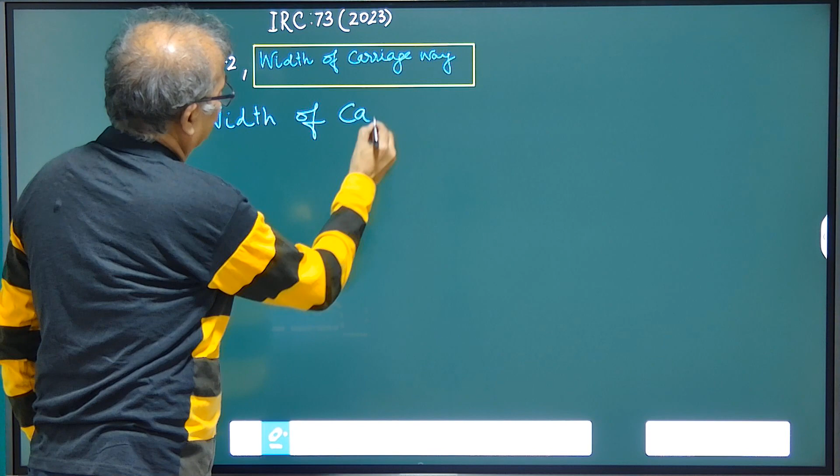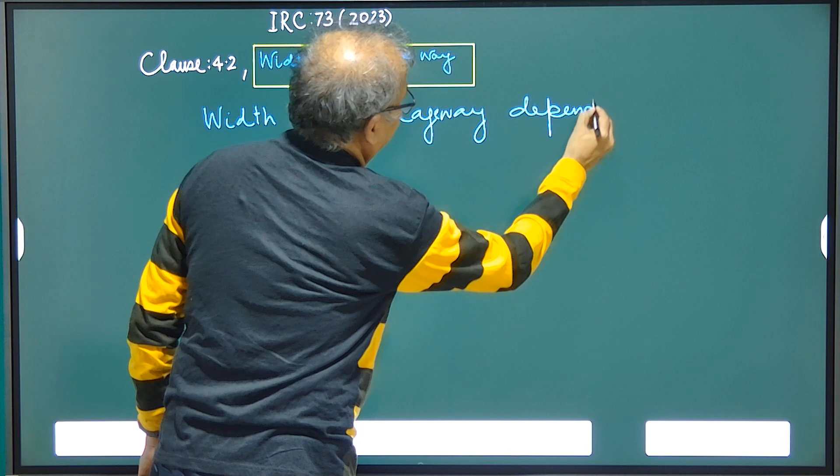सो लेट अस टेक अप विड्थ ऑफ कैरेजवे। Width of carriageway depends on 3 चीजों पे डिपेंड करता है। एक तो ट्रैफिक लेन पे, कितने नंबर ऑफ ट्रैफिक लेन है, विड्थ ऑफ ट्रैफिक लेन क्या है, और उस पर जो मोटर व्हीकल चलेगी उसका विड्थ क्या है, उसके लिए कितने क्लियरेंस की जरूरत होती है। तो ट्रैफिक लेन, ट्रैफिक मूवमेंट के लिए इंटेंडेड फॉर द व्हीकल मूवमेंट, जो भी लेन होती है उसको ट्रैफिक लेन कहते हैं। तो इट डिपेंड्स ऑन फर्स्ट नंबर ऑफ ट्रैफिक लेन्स।

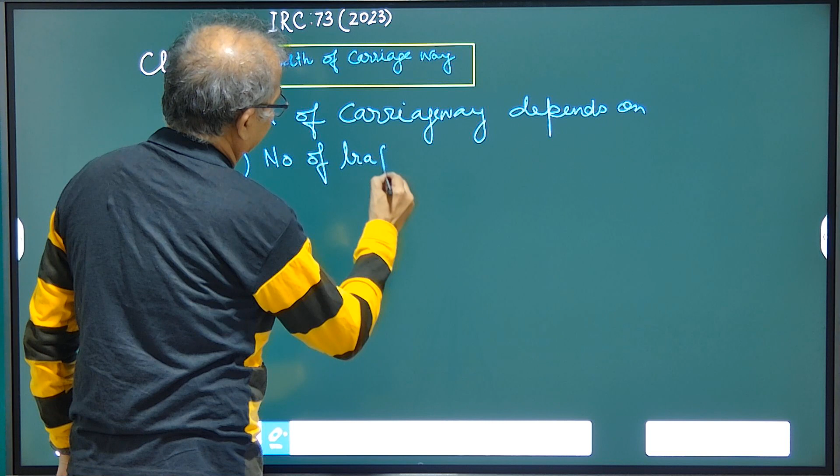Number of traffic lanes. Traffic lane means the lane intended for the single vehicle movement.

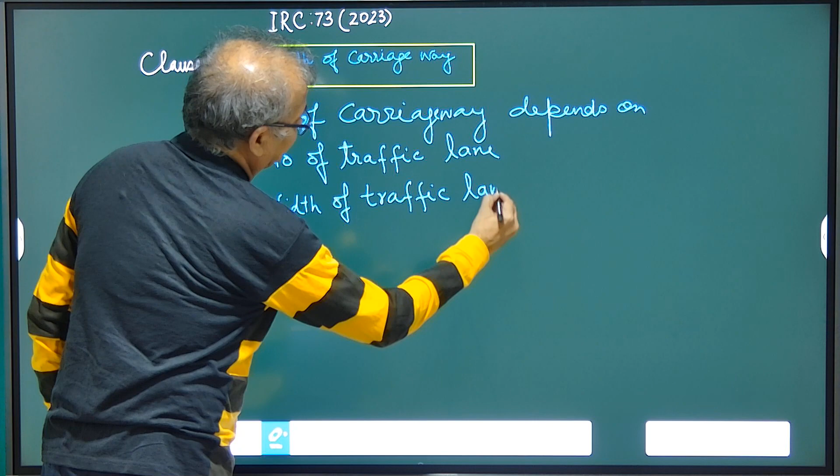Then width of traffic lane. Width of traffic lane जो होती है वो width of vehicle पे डिपेंड करती है। IRC और इल्सवेयर जो स्टैंडर्ड्स हैं उसमें एक स्टैंडर्ड व्हीकल की विड्थ मैक्सिमम मानी गई है 2.44 मीटर की, जो मैक्सिमम विड्थ ऑफ द व्हीकल है। IRC में हर जगह IRC लिखा गया है बट IRC में इसका प्रोविजन मिलता नहीं है, बट इन सम स्टैंडर्ड इट इज इन एक्चुअल इट इज 2.44 मीटर।

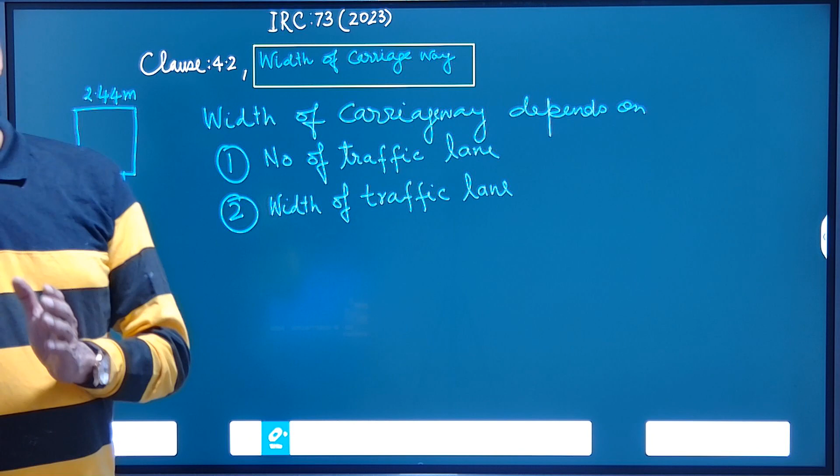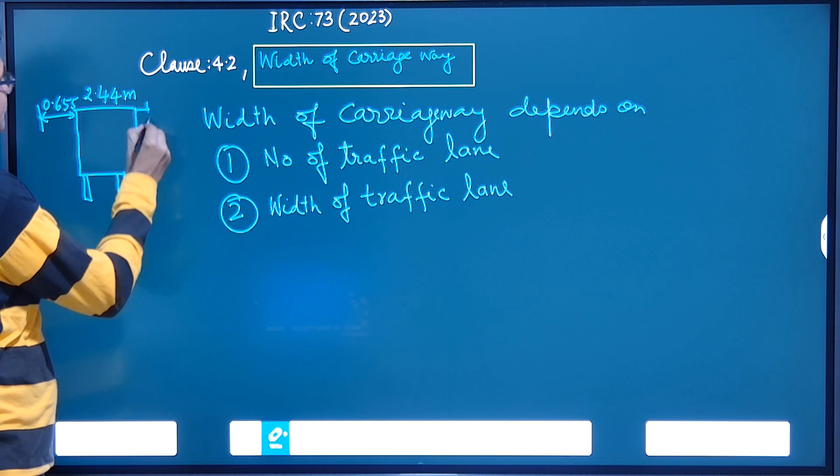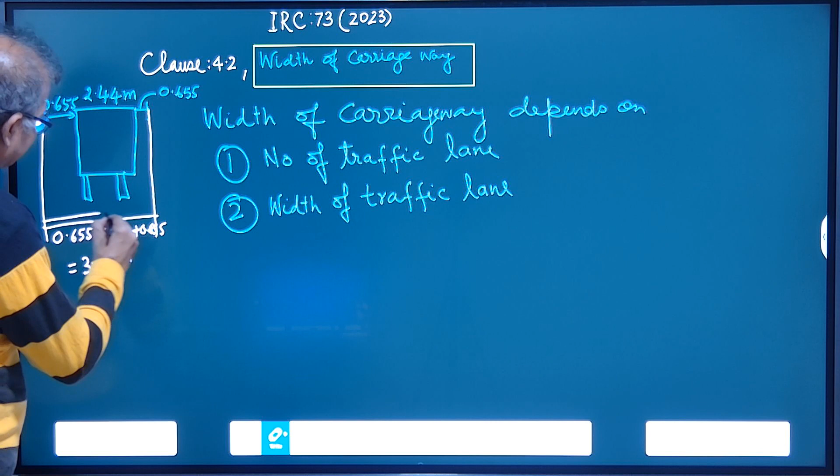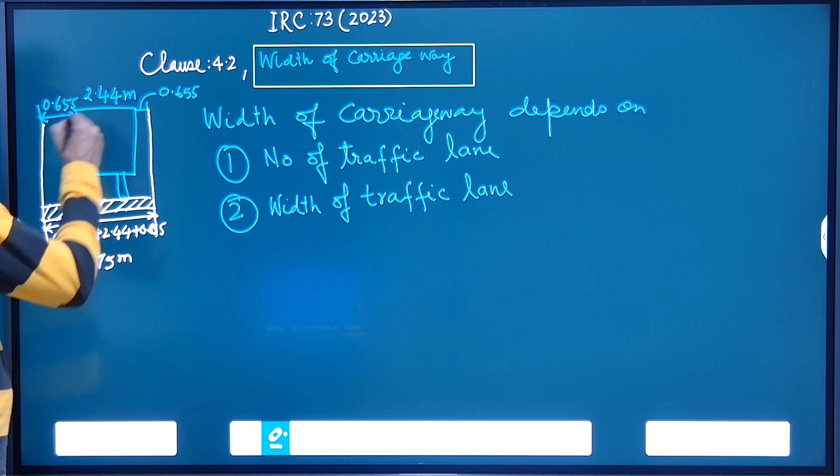जो भी स्टैंडर्ड व्हीकल होगी उसका विड्थ 2.44 मीटर होगा। फॉर द कंफर्टेबल ड्राइविंग जो मार्जिन होना चाहिए, दैट शुड बी ऑन आइदर साइड 0.655 मीटर। सो ये 2.44 की व्हीकल है और उसके पास फास्ट मूवमेंट के लिए दोनों साइड में जो इंटेंडेड क्लियरेंस होता है वो 0.655 हो, तो इस हिसाब से जो सिंगल लेन विड्थ होगी वो होगी 0.655 प्लस 2.44 प्लस 0.655। So if we add on all this, it will become 3.75 meter. जो सिंगल लेन की सड़क हो, that should be 3.75 meter wide to accommodate a traffic movement of a vehicle which is having 2.44 meter maximum width.

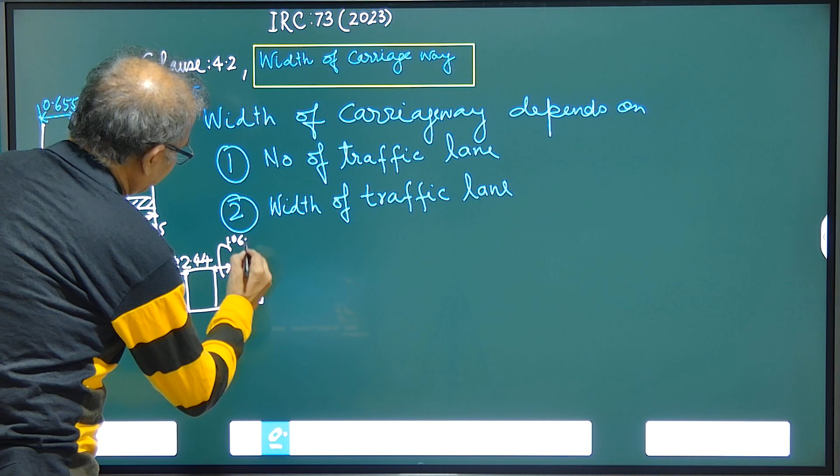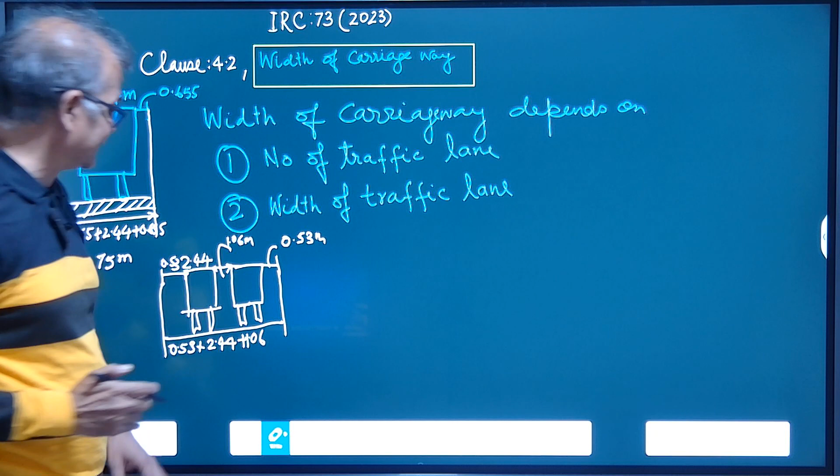In case of two lane, it is desired to have 2.44 meter vehicle with side clearances 0.53 meter. Again, in between two vehicles there should be gap of 1.06 meter. Then again side clearance should be in lateral direction, it should be 0.53 meter. So the lane width will be required for the two lane: 0.53 plus 2.44 plus 1.06 distance between two vehicles plus side clearance plus again 2.44 width of another vehicle plus side clearance 0.53. If we add all this, we find it is 7.0 meter.

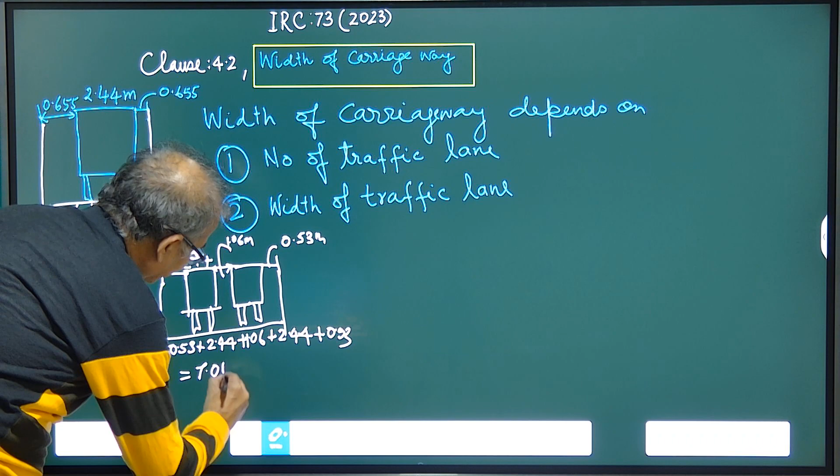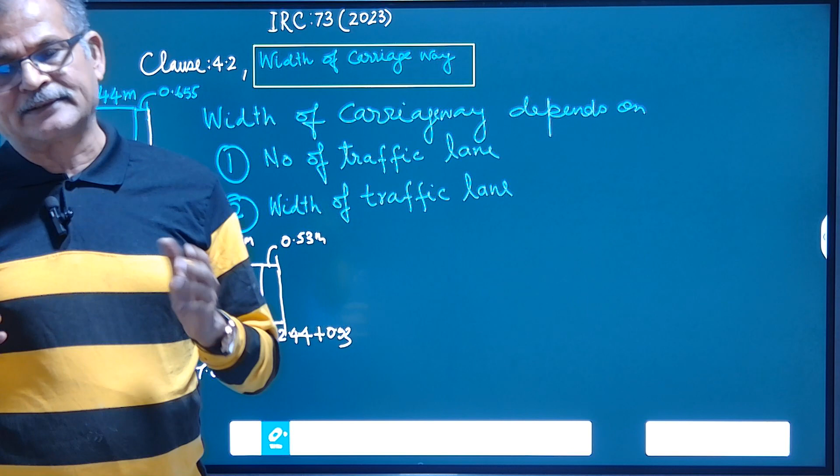It means single lane of 3.75 meter and two lane of 7 meter wide should be constructed, keeping the vehicle width of 2.44 meter. In IRC 03, the maximum width of vehicle is specified as 2.5 meter. Accordingly, the side clearances will get changed. But further, in 2020, it has been again revised. The maximum width of the vehicle has been notified in Gazette as 2.6 meter. So whatever modification and notification is being done by Ministry of Road Transport, we should keep watch on it so that we take the latest values of the width dimensions of the vehicle.

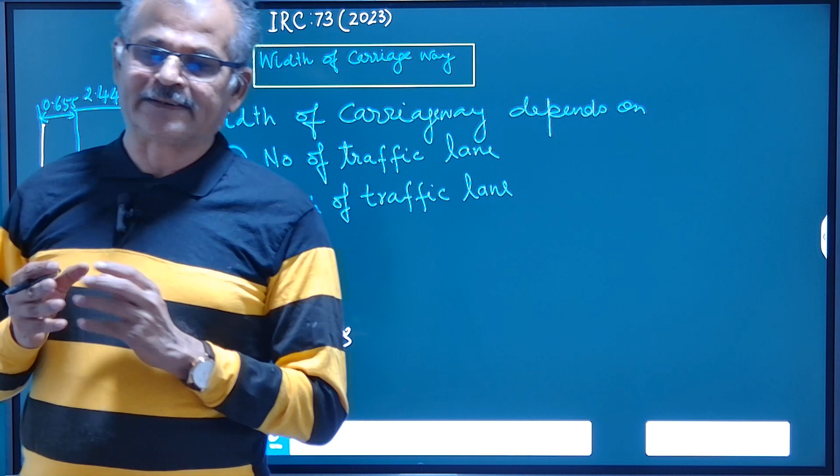We will be taking up IRC 03 to know what is the width of vehicle, what is the maximum weight they can carry, what is vertical clearance, because all this will be required for the designing purpose.

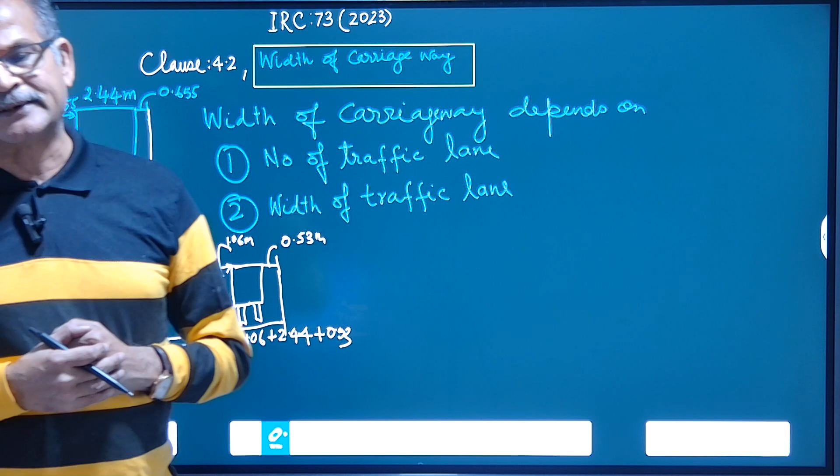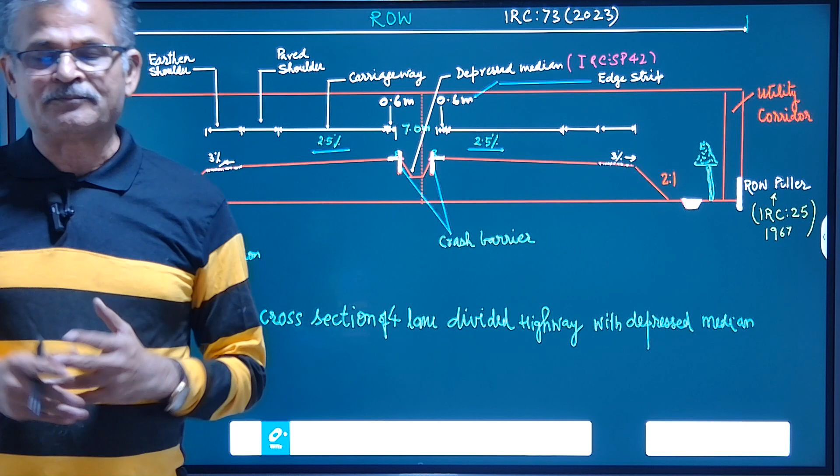So this is figure 4.6 given in IRC 73, showing what should be the width of four lane divided carriageway. This is the typical cross section of a four lane divided highway with depressed median. As said in the introduction, raised median has been completely removed from the IRC code, and with the new project there will be a depressed median of 7 meter wide.

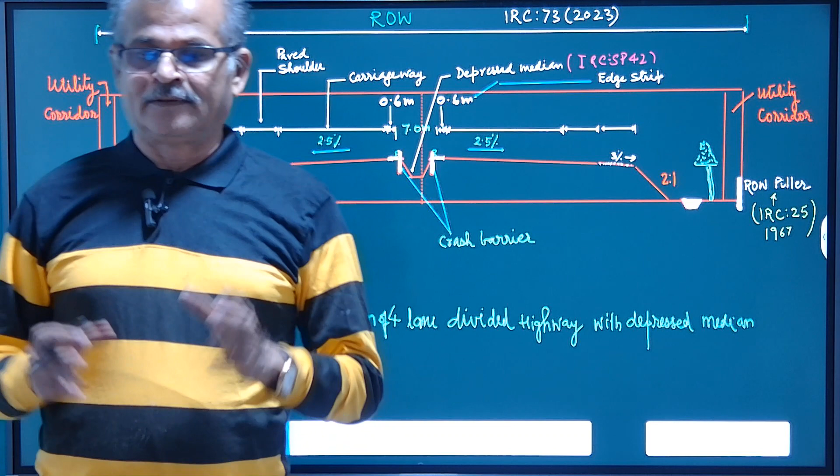There will be an edge strip of 0.6 on both sides, and in the median there will be metal beam crash barriers provided for safety purposes. The detail of this is already given in IRC SP 42.

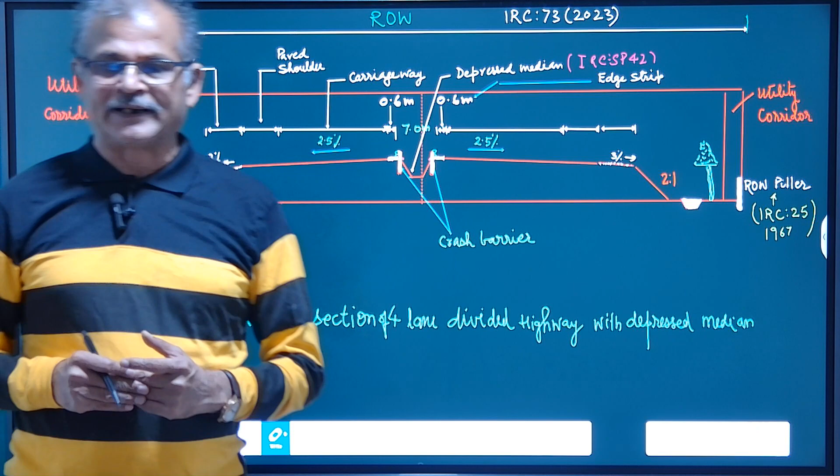What should the design of the depressed median be? We should refer back to IRC SP 42 for designing the depressed median, and SP 99 also gives this detail.

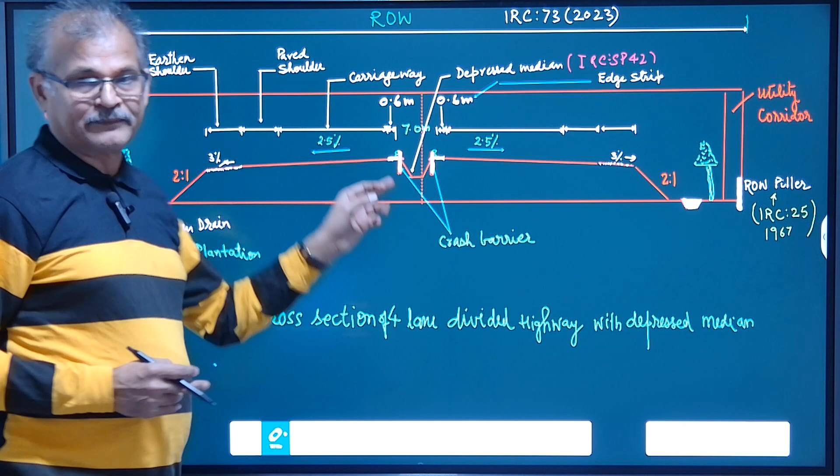We should collect the details wherever available to design the depressed median between the carriageways. The carriageway width is 7 meters. For a four-lane divided carriageway, width for two lanes is 7 meters, then a paved shoulder of 2 meters, then an earthen shoulder of 1.5 meters is provided, with 0.6 meter as edge strip.

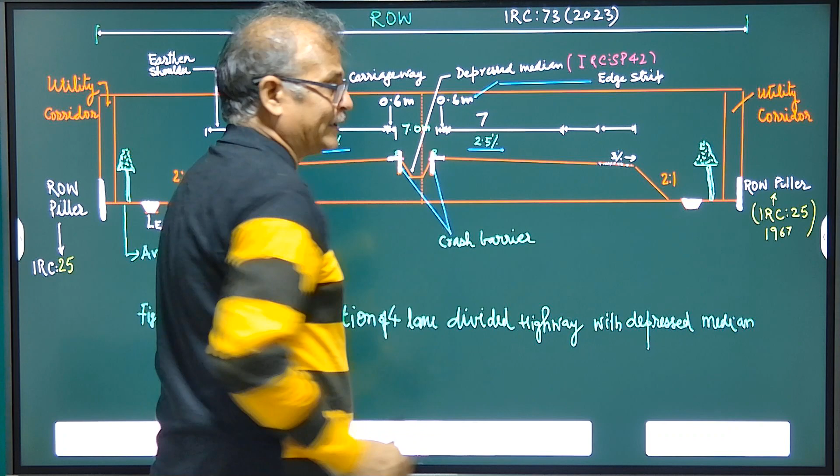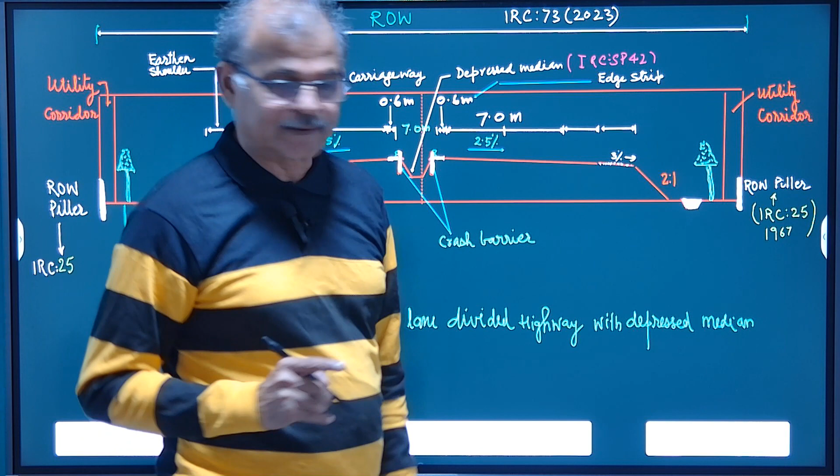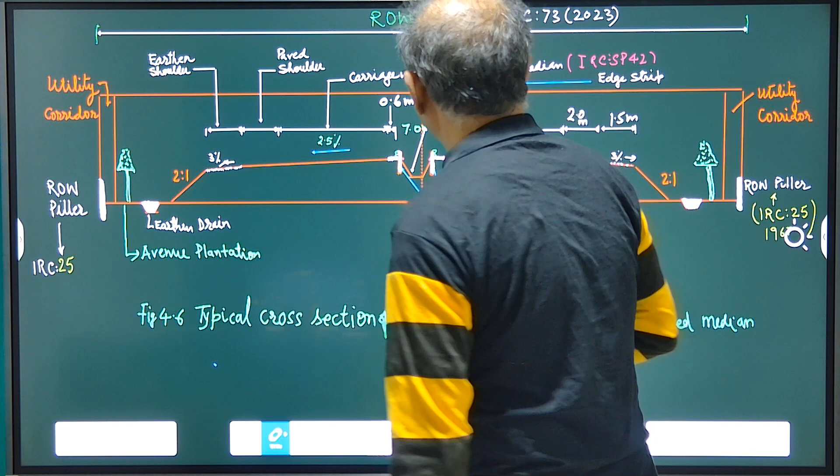Then there will be 7.0 meter two-lane carriageway, plus 2 meter wide paved shoulder, and 1.5 meter wide earthen shoulder. The cross slope in case of flexible pavement should be 2.5%. In case of rigid pavement it should be 2%. Here 2.5% is given.

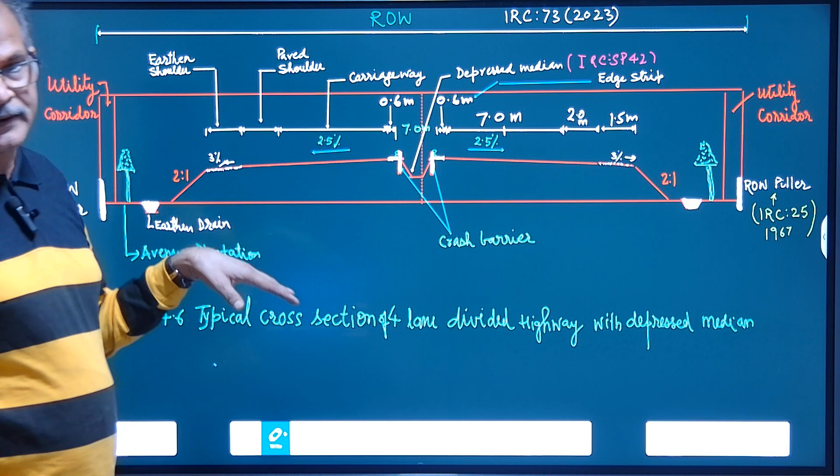It means the proposed carriageway is of flexible pavement, meaning bituminous concrete. And the shoulder, if the carriageway cross slope is 2.5%, should be 0.5% more. So it is 3%.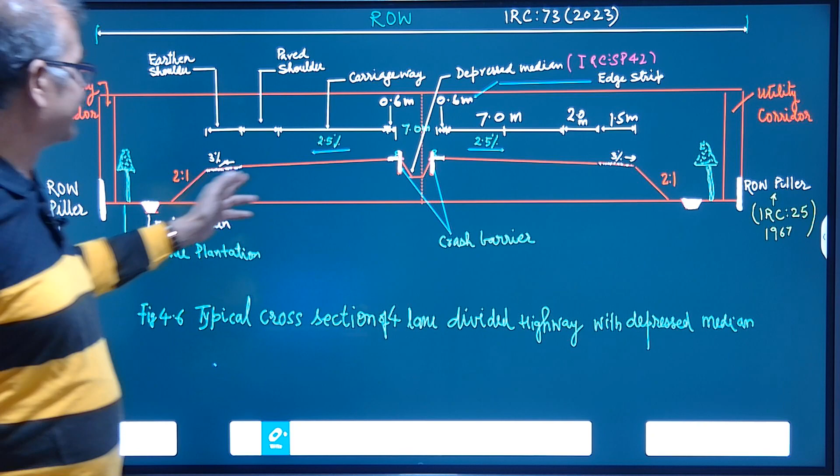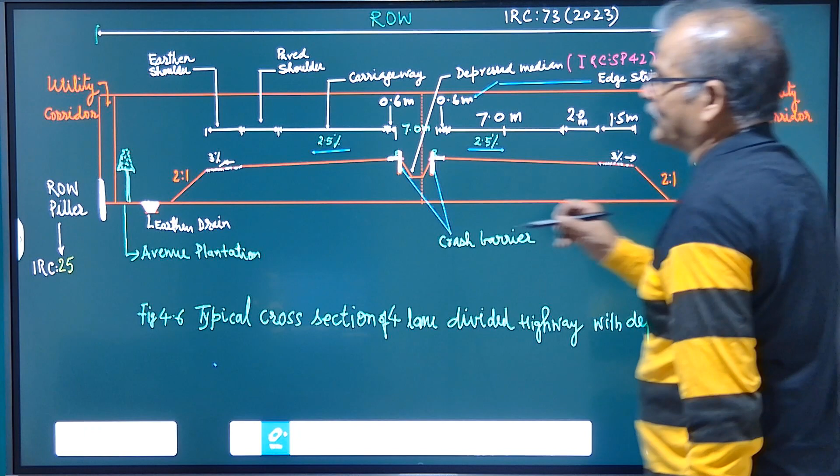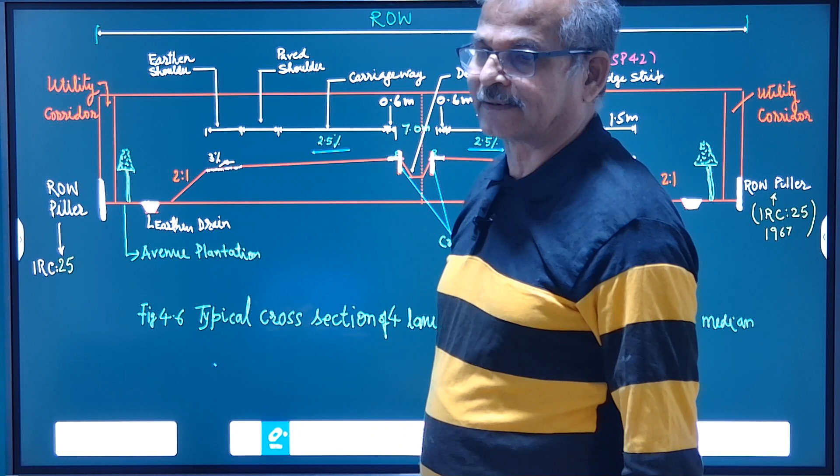Then the slope is 2:1, two horizontal to one vertical, and there will be avenue plantation wherever space is left. At a later stage there will be a utility corridor of 2 meters margin kept for passing utilities along the highway.

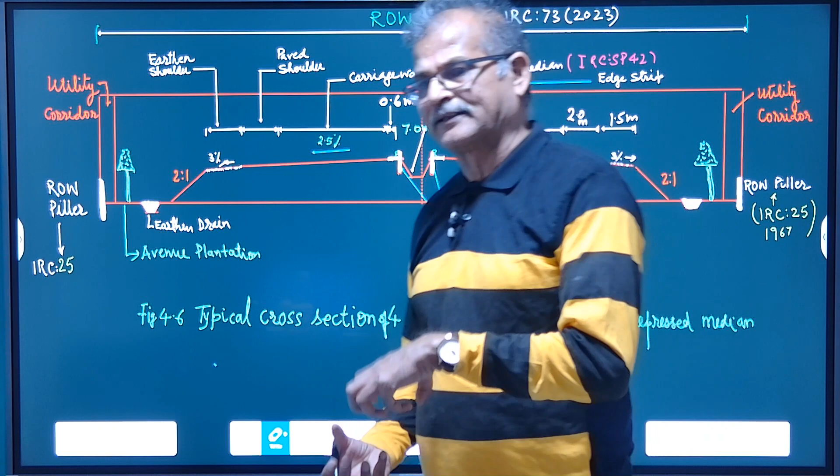Then the ROW pillar at the last should be fixed as per IRC 25/1967. All dimensions of the ROW pillar are given there. With that dimension, the ROW pillar should be cast, and as per specification it should be fixed at the interval given in the IRC code itself.

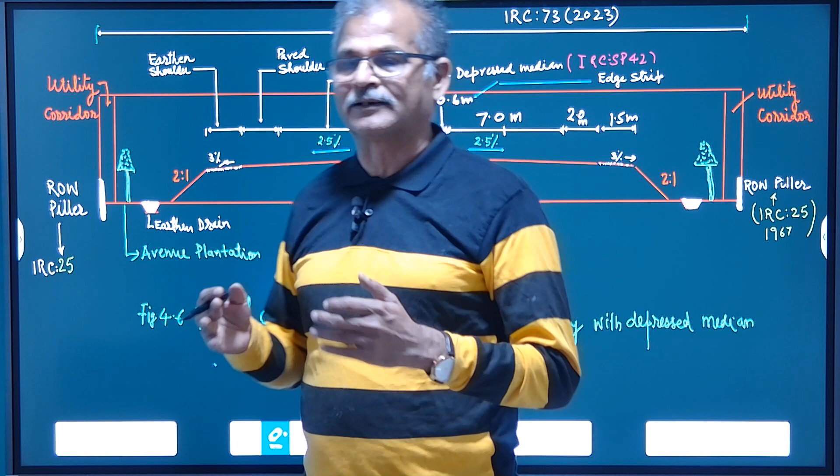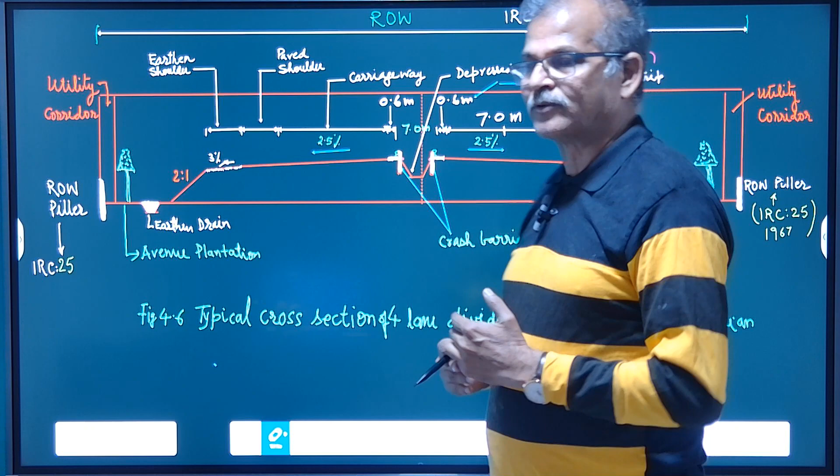The interval was 50 meter, 100 meter, 200 meter. Earlier it was 200 meters, now it is reduced to 50 meters. So the ROW pillar along the longitudinal direction along the highway should be fixed at the extreme boundary of the ROW required.

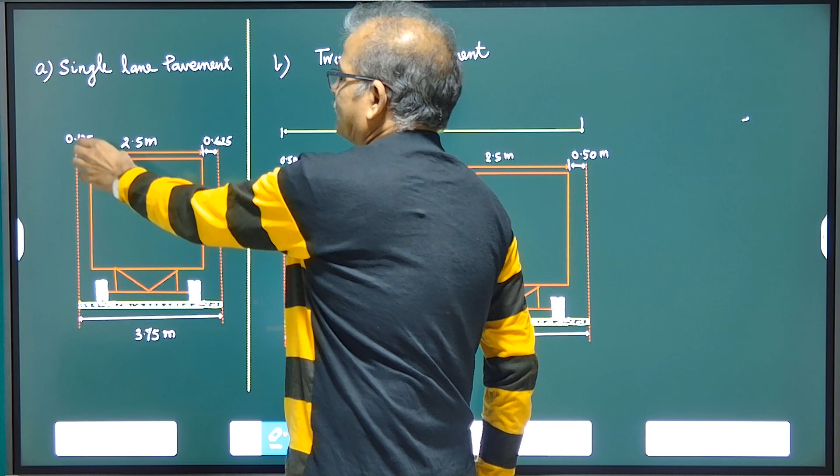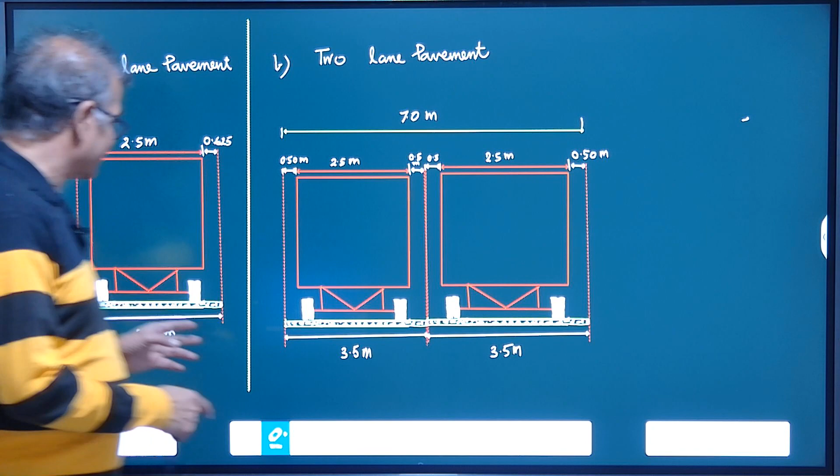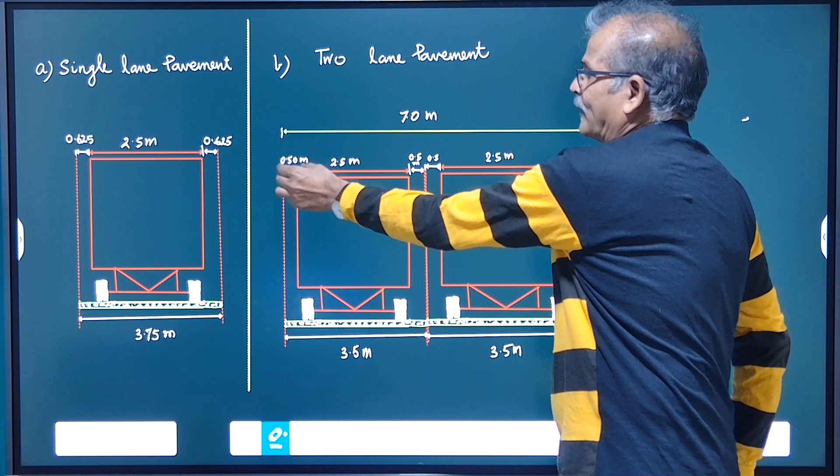In IRC 03, the width of vehicle is 2.5 meter and margins are 0.625 and 0.625. For single lane carriageway the width will be 3.75 meter. For double lane, the side clearance will be 0.50 on each side, and between the two vehicles there should be 1 meter gap when moving in parallel lanes, so total will be 3.5 plus 3.5.

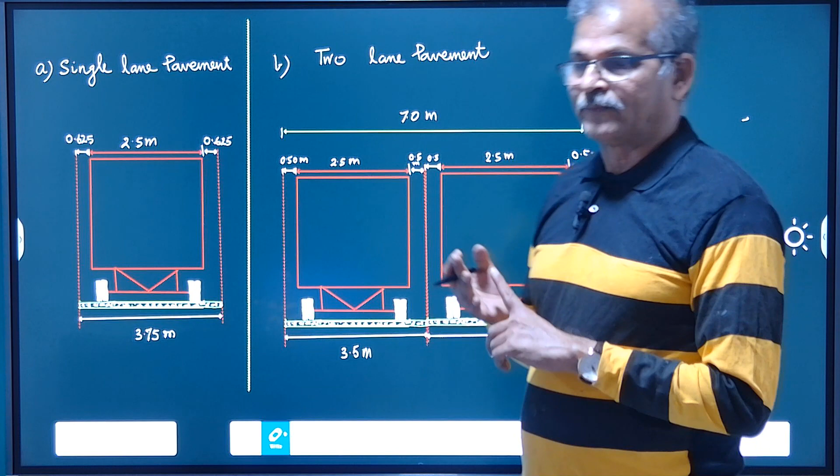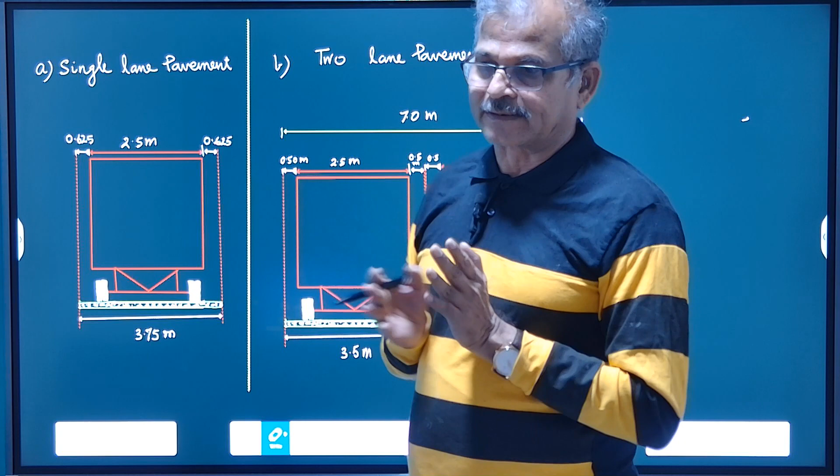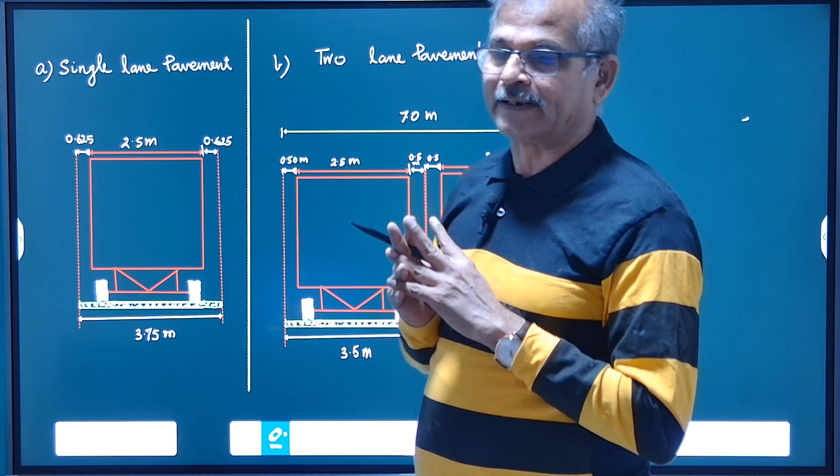So the carriageway width will be 7 meters for two lanes. As per IRC 73 1980, the maximum width of vehicle is 2.5 meters, margins are 0.625 and 0.625 clear clearance in case of single lane, and 1 meter clear gap between two vehicles moving parallel for the two lane. So for two lane it will be 7 meter, and for single lane it will be 3.75 meter.

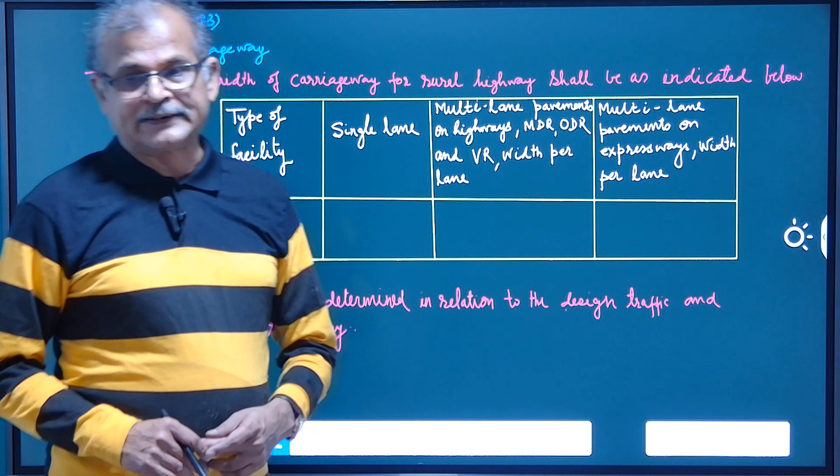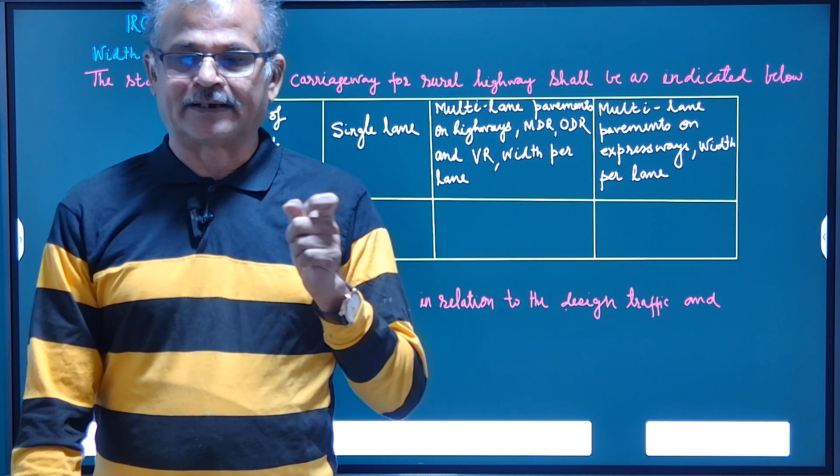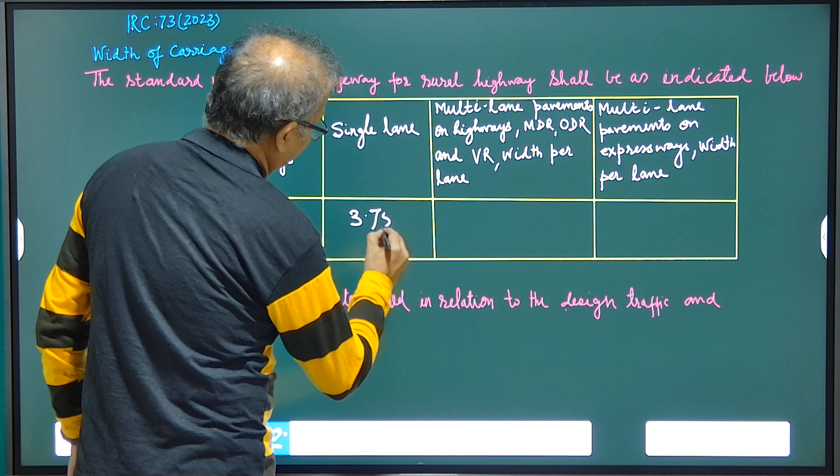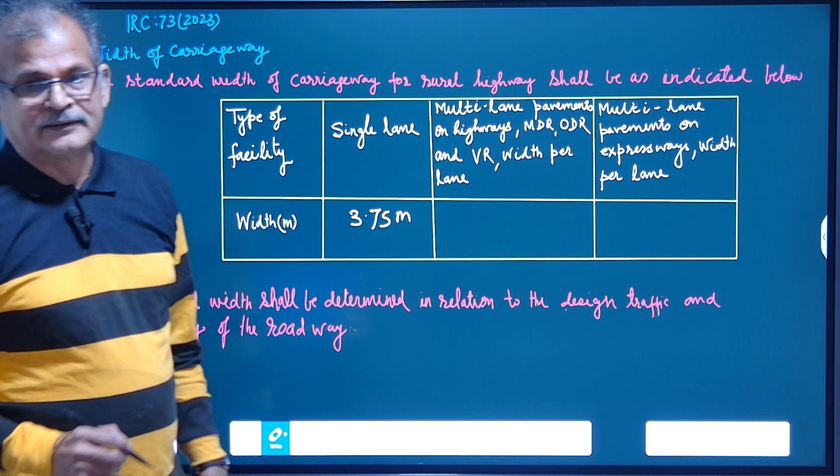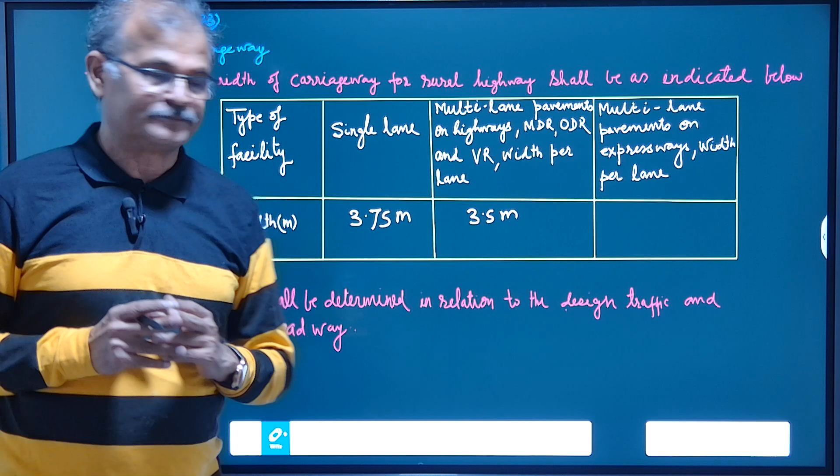For multi-lane pavements on highway, major district road, other district roads, village road, for all these per lane it should be 3.5 meter. If constructing two lanes, it will be 7 meter. If constructing three lanes, it will be 10.5 meter. For wider lanes, every time 3.5 meter will be added to arrive at the carriageway width, plus paved shoulder and earthen shoulder, etc.

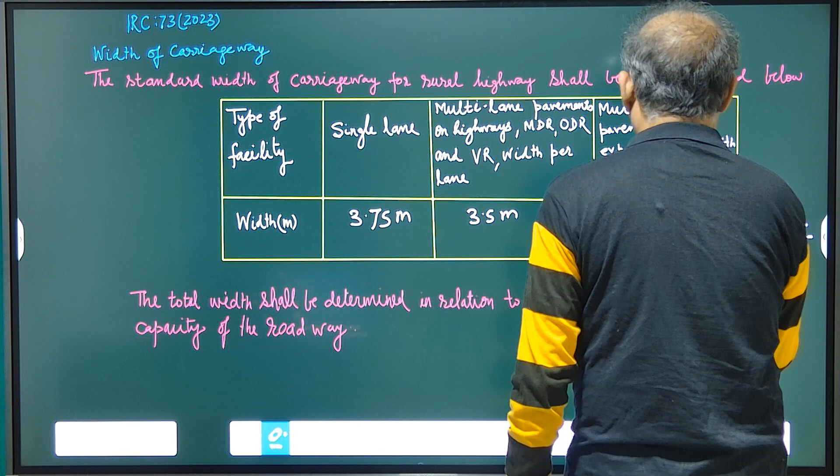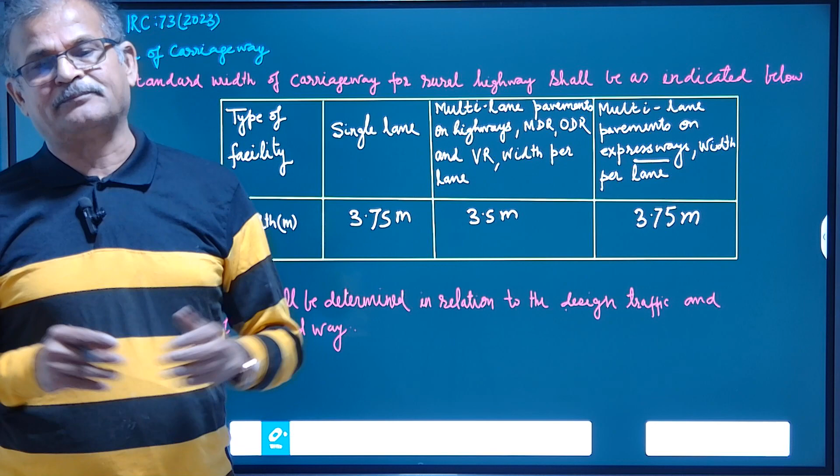For multi-lane pavement on expressway, width per lane should be 3.75 meter. When constructing an expressway, even if it is a 3-lane expressway, the width for each traffic lane should be 3.75 meter. Generally it is more than 3 lanes, so 3 into 3.75 meters should be the carriageway width of the expressway.

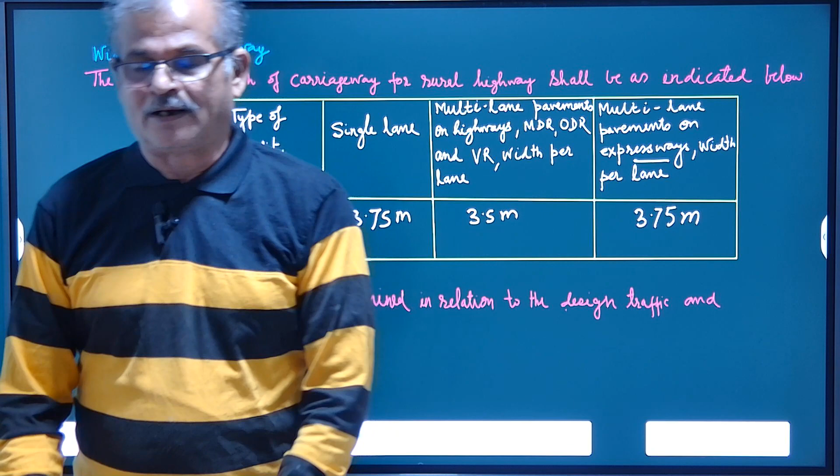So with this we covered how much width of carriageway is required for single lane, 2 lane, 3 lane, multi lane, and expressways, and how it has been arrived at and calculated, based upon the width of the standard vehicle.

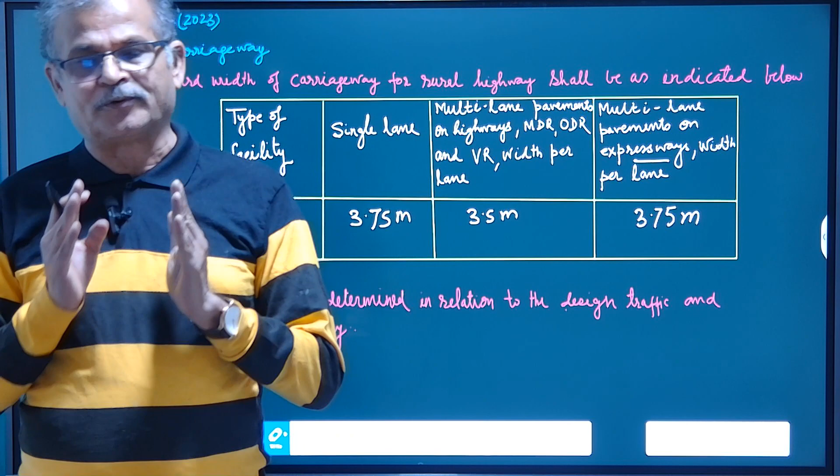Standard vehicle width elsewhere is considered 2.44 meter. In IRC 73 it has been given as 2.5 meter, and accordingly the calculation has been done. With this, hope the width of carriageway will be clear to you all.

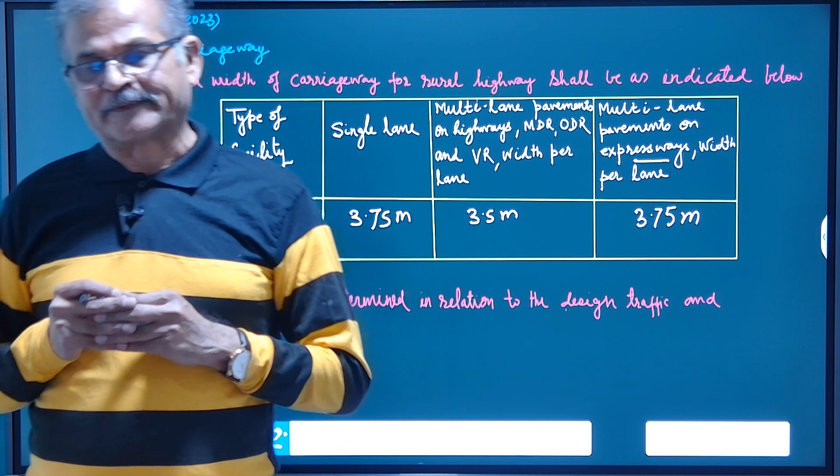In the next lecture, we will be covering more, especially the sight distance in the coming lecture. Thank you.